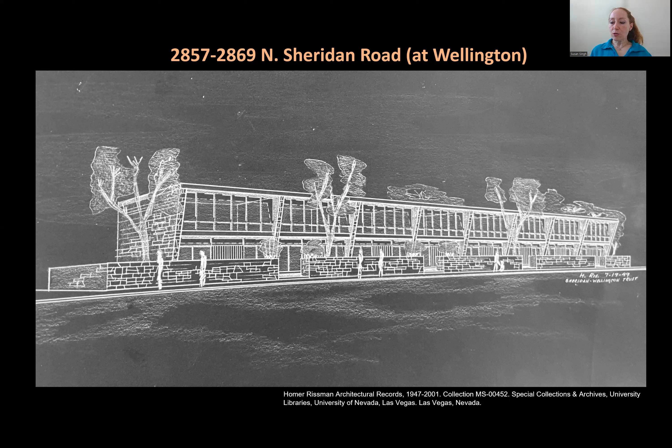Each modest, boxy, flat roof home is approximately 2,000 square feet. Rissman utilizes concrete block framing, precast concrete joists, poured concrete slabs incorporating radiant heating coils, and large floor-to-ceiling steel glazing framing. The kitchens were typically positioned at the front clapboard-clad facade with a large open living plan and full glazing to connect to the rear patio. The second floor would contain 2 to 3 bedrooms, each with floor-to-ceiling glazing and an interior skylit bathroom between.

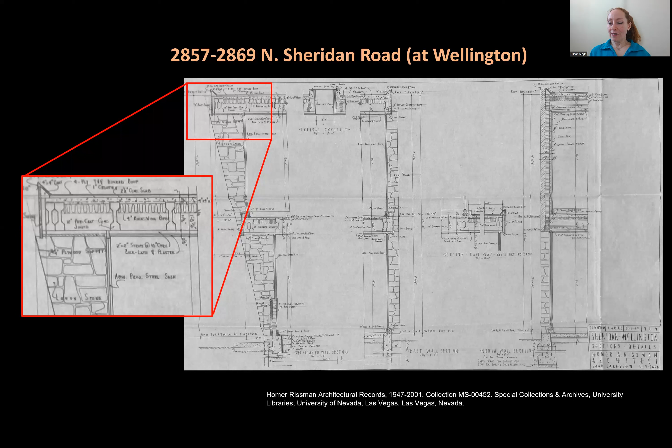Here we have elevation drawings showing the original glazing configuration, and here a typical wall section showing the concrete joist configuration.

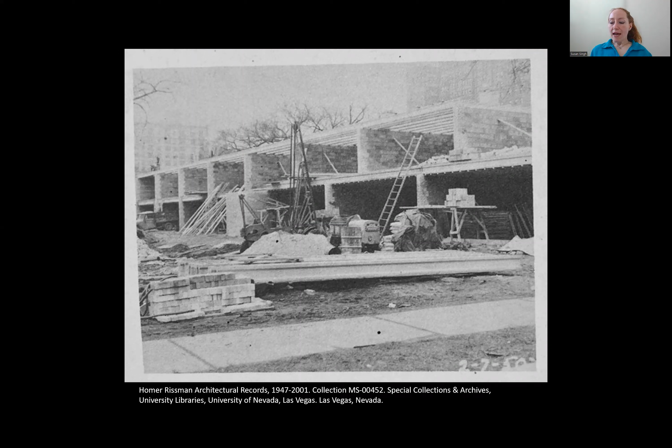Construction photograph here from the Sheridan Road elevation with structure and cladding complete, with the exception of steel framing, glazing, and doors. And here I found a unique in-progress construction photograph of the rear elevation, which shows the concrete block party walls and the installation of the precast joists in progress.

Next, following Rissman's initial success, his design expanded to formulate a true residential complex, with 12 individual units organized in a zigzag configuration around a shared courtyard. The units are 2-story with a half-story basement. The excavated soil was repurposed to create the base of the courtyard and elevated entrance. In conjunction with a stone wall street interface and hidden stair entrance, Rissman creates a harmonious blend of privacy and community above and apart from the urban fabric.

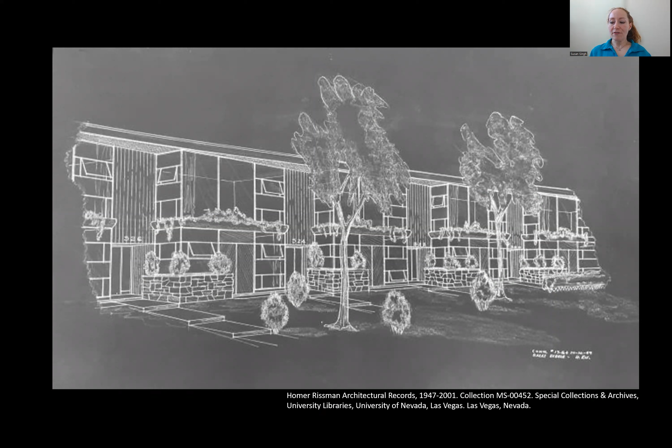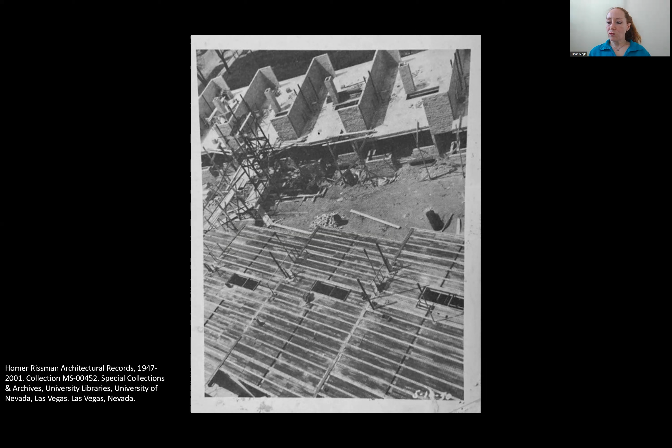Here, Rissman has formulated an early concept drawing with minor material changes and window design modifications incorporated later on. This in-progress construction photo highlights the precast joists in place in conjunction with the formwork used in pouring the concrete slabs. Here we see the framework for the structure, Lannon stone cladding, and initial steel framing before glass installation occurs separately.

Next, the townhomes on West Stratford are facing the street. They're raised and set back from the street, creating a semi-private outdoor space and a buffer between the home entrance and the street interface. Rissman uses a slightly tinted limestone cladding, but repeats the internal concrete structure.

Additionally, at first, the large wood massing appears out of scale and a bit confusing. It was only after seeing this preliminary sketch that I understood the original design intent was to be as a planter with overflowing botanicals to balance the space. All appear to be defunct for that usage today.

The striking distinction here is in Rissman's orientation and layout choice for the complex. Unlike conventional back-to-back lots in Chicago that are typically separated by an alleyway, here the construction spans uninterrupted between Stratford and Cornelia streets. Almost imperceptible from the street, the walkway leads to 6 additional units nestled in a narrow court, each containing a small private patio in the rear.

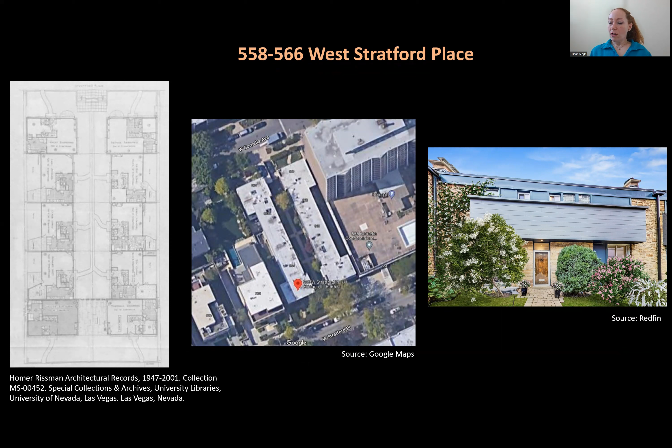And lastly, the Surf and Sheridan complex, Rissman's final townhome complex construction. It's his largest and showcases his adaptability to the evolving preferences of his target clientele. 18 units are arranged in blocks of 6 each, 2 facing each other across an elevated courtyard, with a third facing a side street, each with a private elevated front yard.

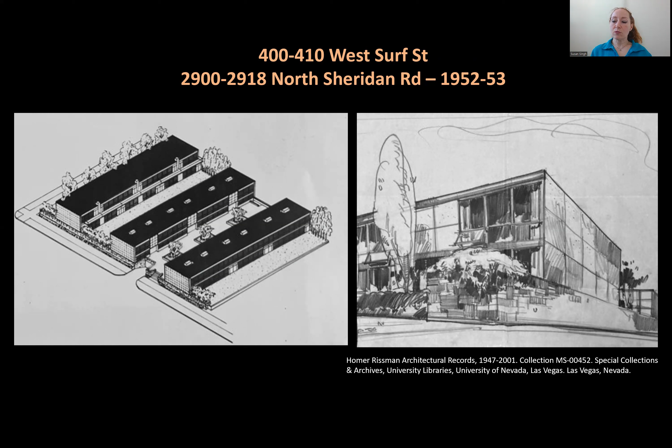There is no deviation from the precast concrete joist and block structural framing. In fact, the joist is exposed and simply painted. The main difference lies in cladding material choice, namely, in addition to the Lannon stone at the base, Rissman adds large limestone panels with anchorage attachments.

We can see where the rough Lannon stone limestone has fared far better with minimal maintenance, whereas the steel anchoring appears to have suffered corrosive effects, causing many of the limestone panels to spall.

Most notably, Rissman incorporates garage space under the courtyard, reflective of increased automobile ownership and catering to the growing demand for urban parking. He explored this need further in several other designs that remained unbuilt.

Now, the discovery that Rissman is an early experimenter using this industrial structural system sparked my curiosity regarding the advent of this technology. I traced the origin of the precast concrete joist and bridging system to a 1931 patent invented by Howard Young of Michigan. The system, known by the trade name Lith-I-Bar, found applications in industrial and commercial constructions, particularly in the Midwest.

I discovered little about the inventor Young. However, I did find a 1942 legal suit filed by Young for patent infringement. Interestingly, the judge ruled in favor of the defendant, claiming that an identical system had already been patented in France in 1926, thereby invalidating the claim to proprietorship.

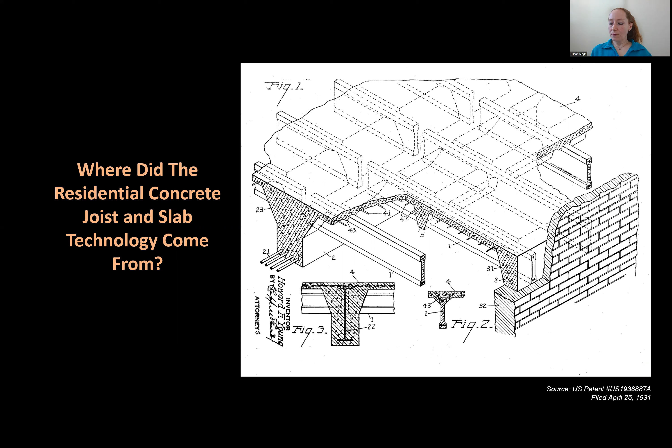During the 1930s, an interesting development emerged from a commercial standpoint. Numerous newspaper articles, both in 1932 and 1935, promote housing using concrete construction, emphasizing the benefits of its fireproof qualities. I discovered the architect was an employee of the Portland Cement Association, and it became evident that these were actually advertisements aimed at promoting the novel material in home construction.

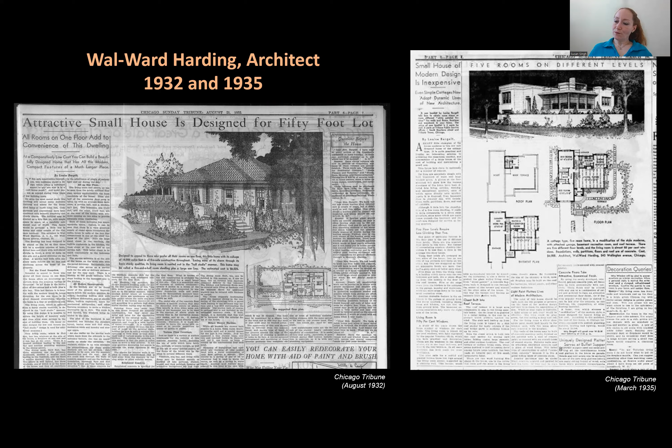Similarly, PCA utilized other advertising pamphlets to espouse the advantages of precast concrete. There was little residential construction activity during the Depression, and it appears the anticipated widespread success did not materialize then as expected.

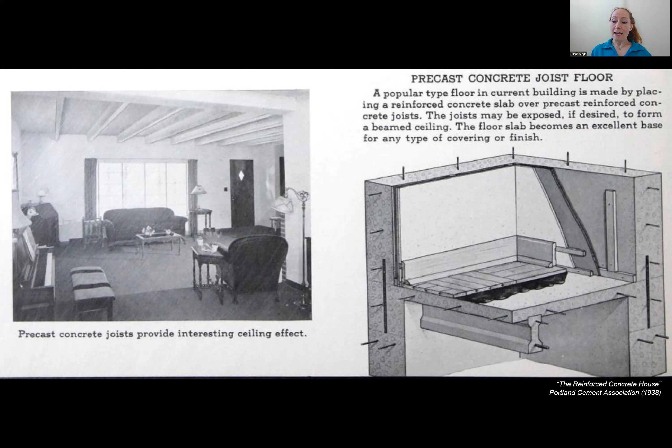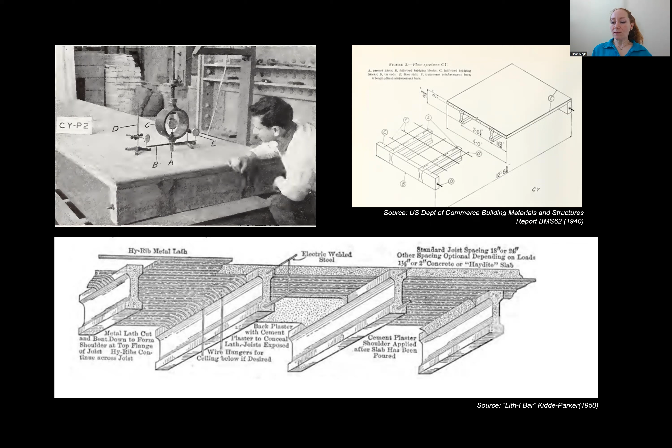During World War II, the government officially initiated extensive research and development efforts focused on building materials, with the aim of creating safety building standards, including precast concrete joist systems. However, as the war concluded and building materials became more readily available again, Rissman recognized the potential for economical housing construction beyond simply the industrial applications.